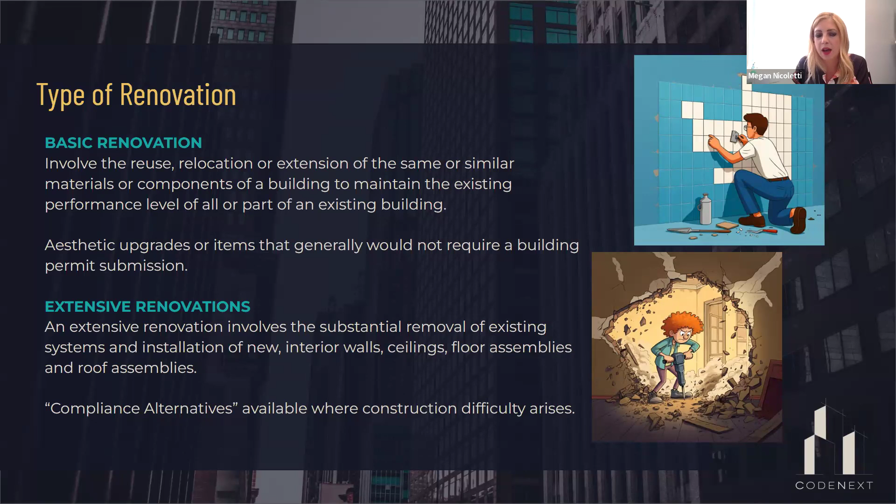And there's a specific requirement under extensive renovations under OBC 11.3.3.2 that I want to really get into the weeds on and go through because I want you to be clear. As a code consultant, word choices are key. We really look at every word. And for any of you who have written your exams, the and, or, except as, those are key words that you really need to tune in on.

And under this clause, 11.3.3.2, this requirement is when you apply barrier-free requirements, so like all your 3.8 requirements, when you're going to enforce them on your project. Because we get a lot of questions that come in and say, okay, well, I'm doing renovations to this space, but I don't want to touch it because it's not currently barrier-free, and I don't know when I need to make it barrier-free. And by adding this door, do I need to now renovate my suite and put in

a universal washroom? And so there's a specific clause that speaks to that, and this is under sentence 3 of 11.3.3.2. And I want you to be aware of that and conjunction. So there are 3 bullets in this requirement, and they are joined by an and conjunction, which means you need to meet every single one of these requirements in order for this sentence to be applied. I know the code does not read this well, so I'm trying to put it in layman's terms for you. So what it's saying is, if you meet every one of these bullets, you need to design that suite to be barrier-free. Okay? You have to meet every bullet.

So let's think to this. New interior walls or floors are installed. Sure, we're doing renovations to this space. So yes, we are doing partition installation. So yes, check for the first bullet. Second one, our suite has an area greater than 300 meters squared. Okay, let's say our suite is 600 meters squared and we're building new walls. Check. Now we go to the third bullet. And this, in layman's terms, is if that suite is accessible.

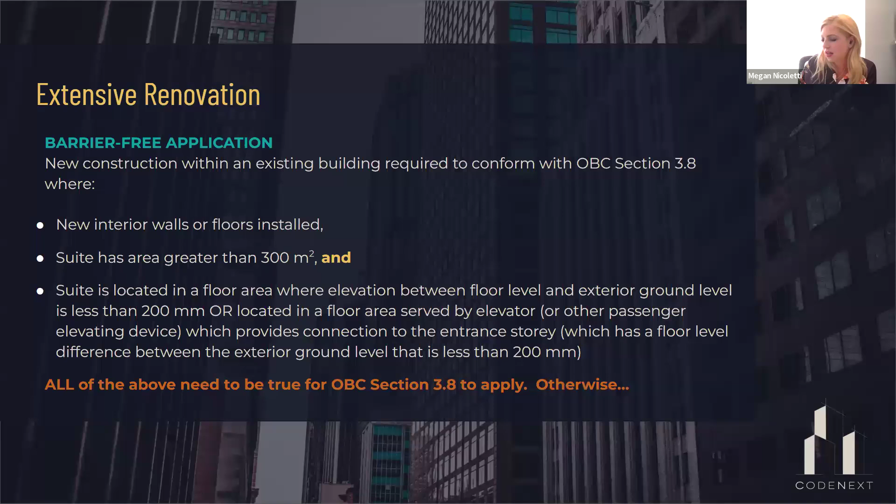Okay, so just note that and conjunction. However, the code does recognize that not everybody requires the use of a wheelchair, and there's other people that can be accommodated, even though we have this barrier at our front entrance. So we call these our limited barrier-free requirements. And these include interior walking surfaces, washrooms, tactile signage, doors, assistive listening devices, counters for telephones, and drinking fountains.

So even if you are exempt from that sentence that says you do not need to comply with barrier-free requirements of 3.8, you still have to design these items to be accessible. Okay, these are applicable no matter whether or not your floor area is served by a barrier-free path of travel. And to give you a little bit of context in that, I want you to think beyond the person in a wheelchair. Who might also benefit from increased access throughout a building, right?

Typically, when we say barrier-free design, people automatically assume someone in a wheelchair, but that's not always the case. We have someone who might require the use of a white cane, vision impairment, someone who uses a walker who can compensate for that single threshold or single stair riser at the entrance door, or maybe even navigate up through an escalator. We have people who maybe broke a leg and use crutches. Sure, they can go up a flight of stairs. Moms with strollers or dads with strollers, or even people with service animals.

All of these requirements for limited barrier-free will provide greater access for persons who have limited mobility and do not necessarily use a wheelchair or have a sensory disability. These people can still climb stairs or use escalators and would benefit from having wider doors or lever-style door handles or larger washrooms to allow them and their service animal.

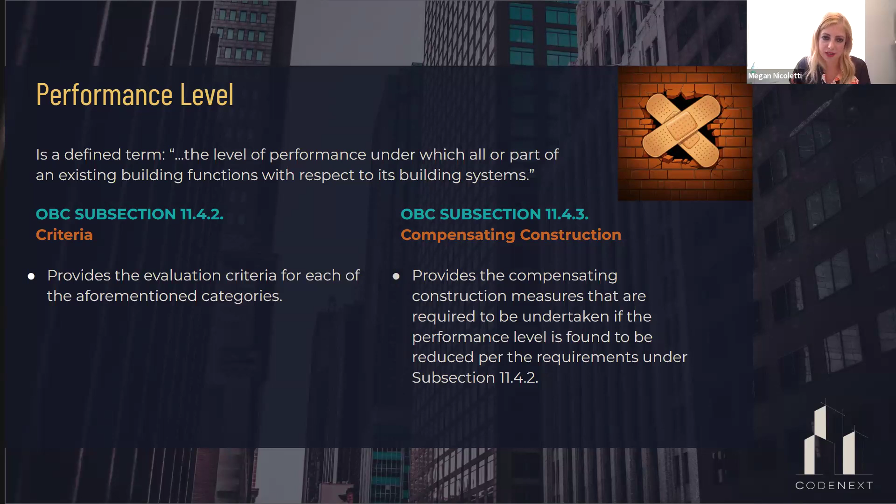So getting into this, this is an evaluating tool. So I'm gonna walk you through all the things that need to be evaluated and what compensating construction requirements need to be addressed. So the code breaks it down into 5 categories. This is all we need to evaluate. We don't need to look beyond this. If it's not prescribed by the building code, you are not obligated to look into it. So for example, if you're not touching your exterior windows, spatial separations is not covered under part 11. You're not obligated to go back and look at spatial separations. Okay, if you're just replacing a window like for like, that's a basic renovation. You don't need a permit. You're good to go. You don't need to evaluate it.

Okay. These are the only categories that you need to evaluate: structural systems, occupant load, change in major occupancy, plumbing systems, and sewage systems. That's all you have to look at. And if you affect any of those, then you have to do compensating construction for that. Okay?

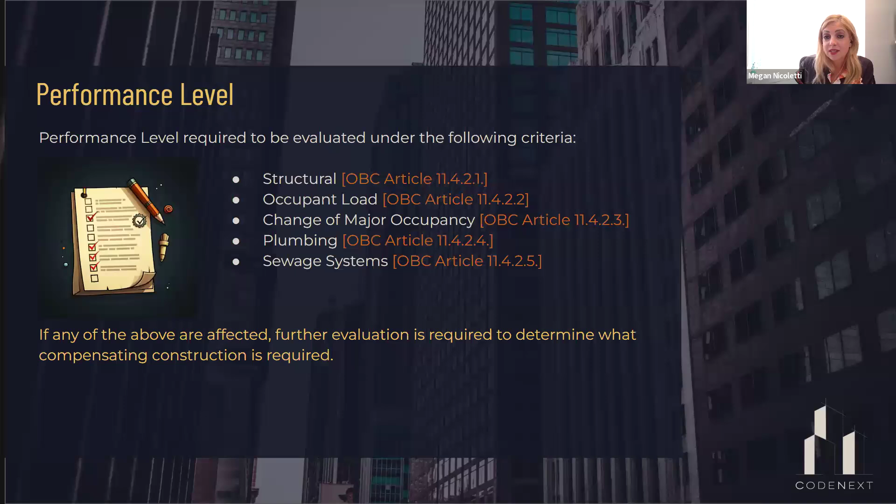If it's not on this list, you don't need to worry about it. So let's get into the weeds here. Structural systems. So the criteria, and again, the whole framework of this presentation: evaluation, compensating construction. So under 11.4.2.1, the evaluation for structural systems is to ensure that your structural systems are not adversely affected by a change in major occupancy, an occupant load increase, or a live load increase, okay?

To put that into better perspective, we have a building and we have an office floor area and the office tenant moves out and we put in a Zumba class, okay? Well, those people are now jumping on the floor. Is the floor strong enough to hold up that Zumba class? It's an A2, it's a fitness thing, right? Somebody needs to evaluate it.

So typically this falls into the wheelhouse of the structural engineer, but they need to evaluate it. And if that floor is not strong enough, they're gonna have to upgrade it. Right? So they have to take remedial measures. So that is a classic example, very straightforward for structural.

If you think that your structural systems are going to be affected by your change in major occupancy, or you're adding more people to a space, and it's going to be heavier, or your live load's going to change, then you should engage a structural engineer to evaluate that further and make sure those floor systems are strong enough.

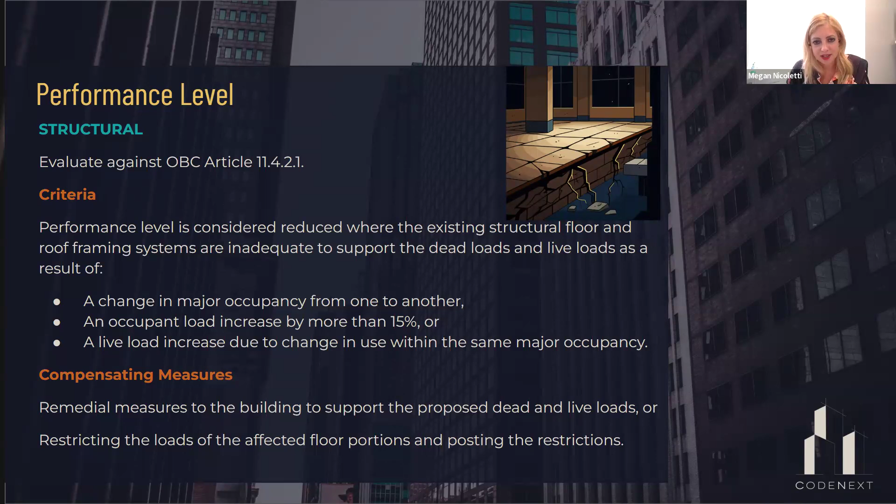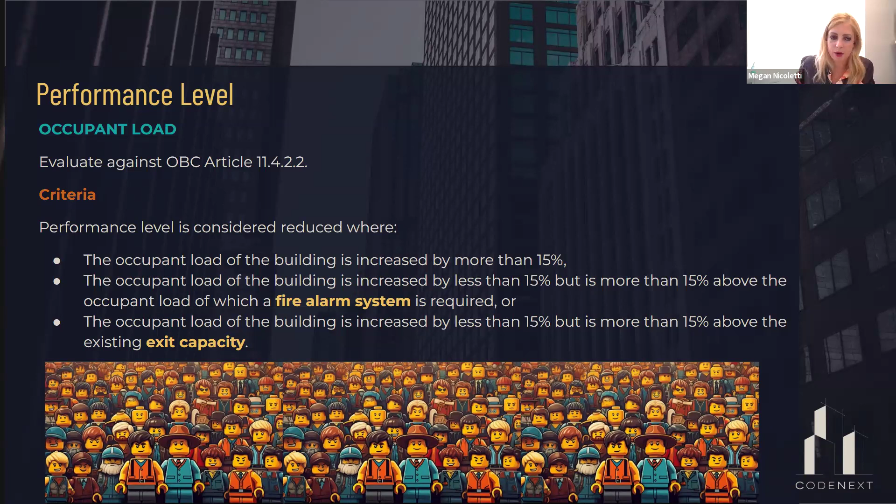Okay. The next topic, next bullet, would be occupant load. What do we mean on occupant load? So our criteria for assessing occupant load is, are we going to increase the occupant load of the building by more than 15%? If we're going to increase it by less than 15%, but beyond that which is for a fire alarm system or an exit capacity, then that's also deemed affecting the performance level and we have to evaluate it. So these are a bit harder to read, so I'm going to break these apart and get into them a little bit more deeply to clarify here.

So speaking to an increase in occupant load by more than 15%. The code gives you a bit of a construction tolerance here in the sense that if you're adding a few more people to a floor area, you don't have to go back and evaluate it. The codes are built robust enough that they can support an increase. The code considers it affecting the performance level in an adverse manner if you're more than 15%. So that's your threshold. If you're going to increase by more than 15% beyond which the building was designed for, you should evaluate it and see what's needed to support all those extra people.

Okay. Now I want you to be mindful of the language here. The 15% is increased beyond the occupant load of the building. It's not specific to a suite. Okay, so if we have an occupant load of a building of 100 people and we increase our occupant load to 115, we're not more than 15%, so we don't need to evaluate it any further. We can just say we're good to go, we don't need compensating construction. But if we increase that occupant load of the building to 116 people, then we have to evaluate it and potentially do some upgrades to our building.

Where it gets into the gray zone a little bit is with respect to increasing the occupant load of our suite. So we have a 10-story building, we have 10 people per floor area, and we're allowed to go up to 115 or 116 people. But what if one tenant wants to take all 16 of those people and put them onto their suite? Technically, the requirement of the code is satisfied because we're not increasing the occupant load of the building as a whole, but that suite is getting the benefit of that increase in occupant load.

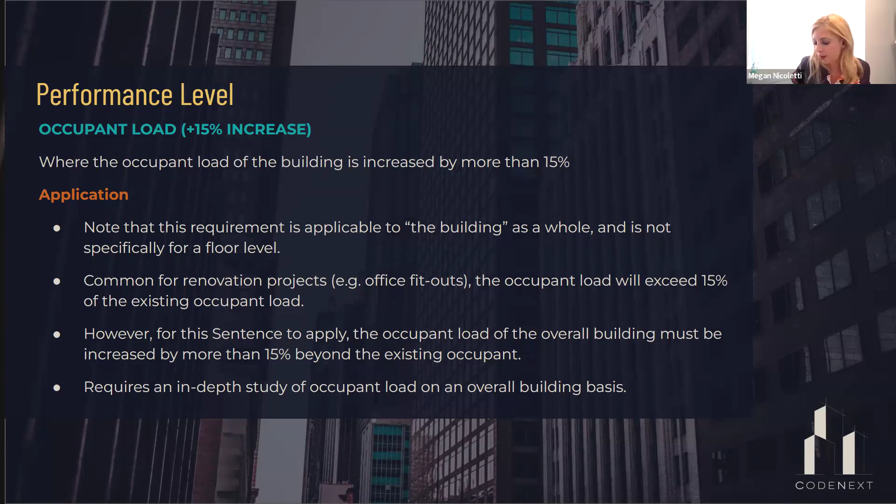The other requirement for increasing occupant load is increasing beyond that which is required for a fire alarm system. Now, the language of this article is quite specific, and it says where the occupant load of a building is increased by more than 15% beyond the requirements for a fire alarm system. So OBC section 3.2.4, it speaks to fire alarm systems, and it speaks to when you would require a fire alarm system.

So again, just going through an example here, if we have an existing building occupant load of 299 people, and we propose to increase it to 325. Well, the requirements state that you need a fire alarm system if your building occupant load is more than 300 people. So by verbatim of the code under Part 3, you would need a fire alarm system. But this is a grace that you get under Part 11, and it's saying you can increase 15% beyond that threshold.

So technically, 15% beyond 300 is 345 people. Okay, so as long as you don't go over that 345 people, you don't need to install a fire alarm system. Your occupant load increase is permitted, and you don't need any compensating construction in this regard, because in this scenario, we're only proposing 325. We're staying within that threshold. Okay, so be mindful of that language. That beyond is a key takeaway from this. And that's very similar to how we analyze exit capacity as well.

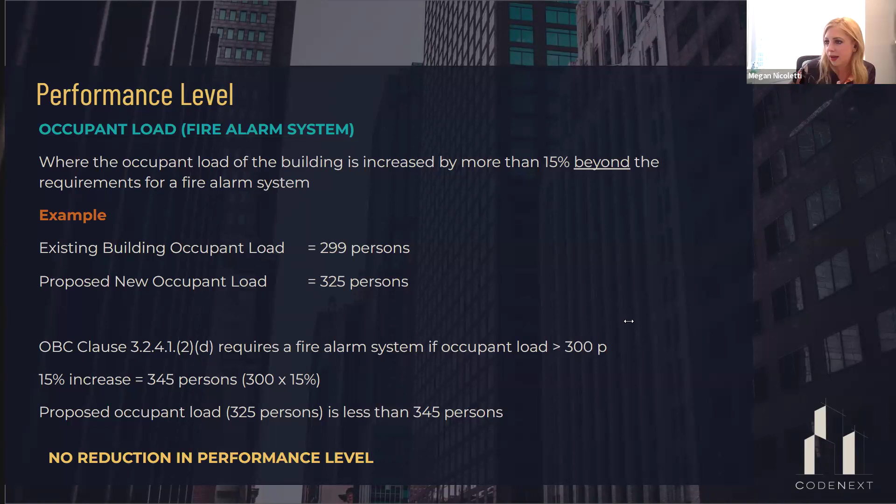Moving over to exit capacity. Again, same language, beyond, but more than 15% beyond the available exit capacity. Okay, so exit capacity is also determined under Part 3 or Part 9. I forgot to mention this. Part 11 does cover Part 3 or Part 9 buildings. Okay, so you can apply it in either situation. I speak generally when I say Part 3, but the same requirements could be applied to Part 9.

So exit capacity, our exits have a certain flow rate that we use to calculate an evacuation time for a building. And we want to ensure that we have a sufficient number of exit facilities, whether they're doors or exit stairs, to get people out of that building in a timely fashion. So if we're going to add more people to a floor area, then we might be creating some queuing at our exits, right? Which is going to delay egress. So again, we want to make sure that we have sufficient exit capacity, and it's that 15% beyond.

Okay. We often see people limit their occupant load increases based on exit capacity, because, sure, we can add another toilet here or there, or a fire alarm system might be able to be accommodated in a building, but sometimes it's very difficult to put an exit stair in a building. So in that case, we often see people limit the occupant load, and they advise their clients, all right, you can increase, but I suggest you increase only to 15%. You don't want to go beyond that threshold, because that may warrant an additional exit facility be installed into your building. Okay. There are also compliance alternatives on this, but I will speak more to those later.

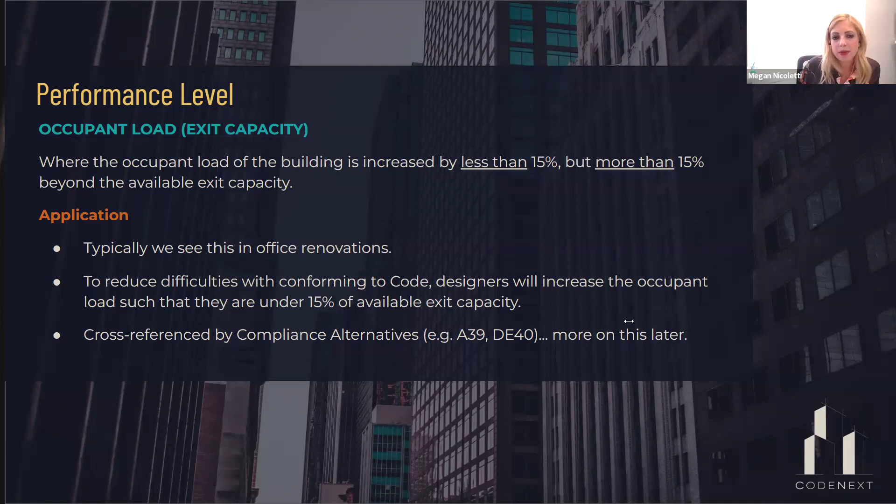So if we affect any of these, if we've increased our occupant load by more than 15%, we've added more people to our floor, or we've gone beyond those design requirements for a fire alarm system or an exit facility, we've affected the performance level. So we have to do compensating construction. So the compensating construction associated with an increase in occupant load is defined as requiring an evaluation of the early warning and evacuation systems.

Okay, this is an actual table right under Part 11, and it says go through and analyze this. And it's essentially a checklist, and it just says make sure that you aren't affecting travel distance, that you have enough emergency lighting, exit signs are put in. These typically, in my experience, have been picked up as part of your design fit out for that space, but it's a good little checklist for you to use.

So if you are increasing the occupant load of a space, then the building code is going to require that you evaluate the early warning and evacuation systems. I've put a little list there for your benefit. And if any of those are affected by your proposed increase in occupant load, then you will have to do compensating construction. So I'll tune in on that second last bullet, door release hardware. Our previous occupant load was, say, 50 people, and we're increasing it to 125 people.

Well, we're going to need panic hardware on our doors now, because we're over 100 people in those suites. Okay, so those are some of the upgrades that might be needed or warranted as part of that increase in occupant load. There are some exceptions to evaluating the early warning and evacuation system. These lean heavily on the Group C major occupancies, and boarding and rooming houses, or residential applications that have a very minimal small occupant load, like 14 or 10 people. So those are typically the only exceptions to evaluating that.

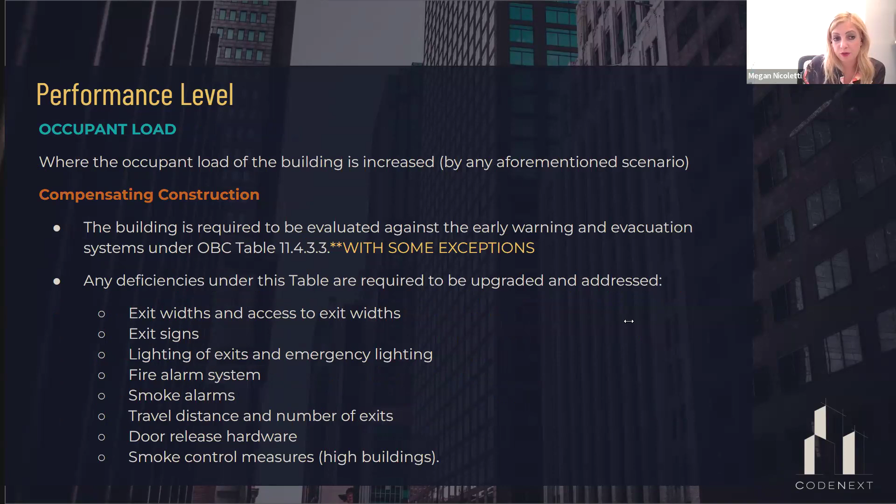Another compensating construction, and this is only applicable in Part 11. I'm not speaking to Part 10 here, but other things that have to be evaluated when we're, oh, sorry, did I jump ahead here? I did. Sorry, the next topic that we have to look at when we're evaluating performance level is change in major occupancy. So change in major occupancy, I spoke to it before. The OBC categorizes your occupancy types. So we have our Group A, our assembly, our Group B is kind of our detention and healthcare facilities. Group C, residential. Group D is our offices and our business suites. E, retail. F, industrial. And G for our kind of greenhouse or farm buildings.

And we see this a lot. We've got an apartment building that has a pool that's no longer used. And the owner's like, well, rent rates are quite high right now. I could get 3 suites out of this. Let's rip out the pool and we're going to put in 3 suites. That would be considered a change in major occupancy, even though it doesn't really fit the language of the code, but it is affecting the performance level of the building, and you need to do a full evaluation of it and potentially compensating construction. If we're flipping a Group A2 or a Group A4 into a gaming premises, those have a lot of specific requirements under the codes. We want you to evaluate those.

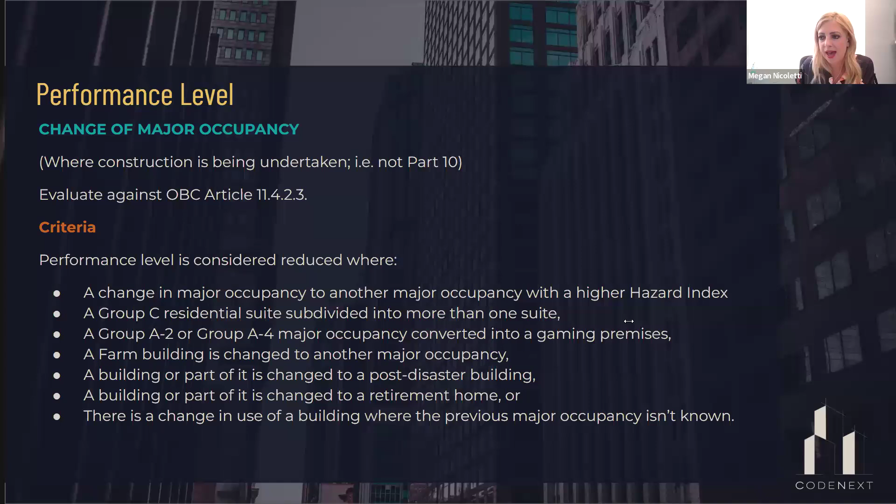The code's going to ask that you evaluate it. Okay. So if you check any of these, even though they don't really fit within the language of change in major occupancy per se, you do have to do further evaluation and potentially compensating construction. So let's go look at how we would kind of evaluate that and what the compensating construction is.

The code breaks down these requirements into hazard index and construction index. And this is probably what your biggest takeaway will be from this presentation, how we actually figure this out. And I'm going to walk you right through it, so hopefully you'll have some clarity here. This is the table for compensating construction, 11.4.3.4. Okay. And what it's saying is you have to assess the hazard index of the building. And if you make the hazard increased, then you have to do compensating construction.

But it needs to understand what the building is made of to see what upgrades are needed. And this is really in terms of your structural systems, your floor systems. Like, do we need to upgrade our floors, right? And it needs to know, are you a wood frame building? Are you a non-combustible building? All those come into play. Are you sprinklered? So these compensating construction requirements really hang on the construction of the building.

And they speak to, okay, well, this new occupancy is quite risky, we're going to want to see a sprinkler system installed in this space. Okay. So these compensating construction requirements, and I'll come back to this table, are how we really determine what we evaluate against. So let's get into this. Hazard index. This is the first step. We have to figure out what the hazard index is of our existing building, and we have to evaluate it against the hazard index of our proposed building.

So again, going on to that warehouse space, we have to assign a hazard index to the warehouse based on its functions and use. And then we have to evaluate it against a hazard index for our new office space. And if our office space has a higher number, then it's riskier, and we potentially have to do compensating construction.

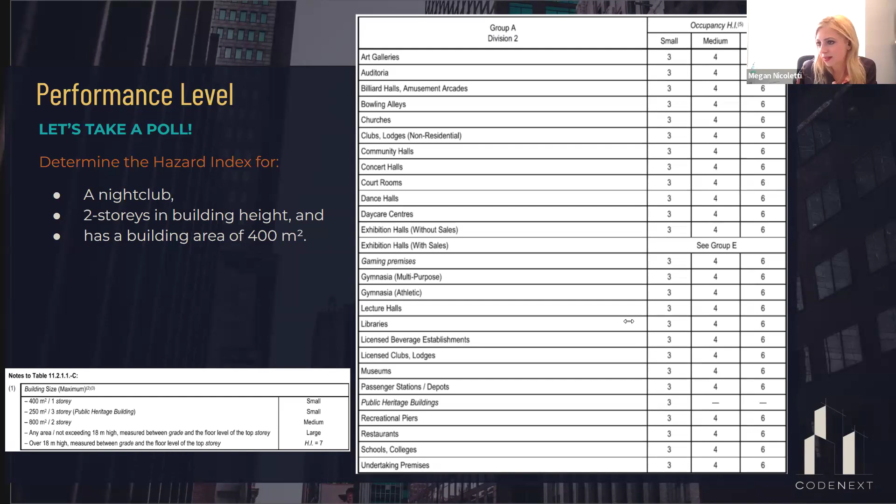So now we know, going back to our example here, we have an office occupancy, we assigned a hazard index of 2, and now we're making it a 4. We made it worse. It's got more hazard, right? It's a bigger number. So we need to do upgrades to the building to support that occupancy. So let's see here. The way the code is structured is, and I'm going to go back here. Let's see if I can go back. Yes. This is the table that we are now applying.

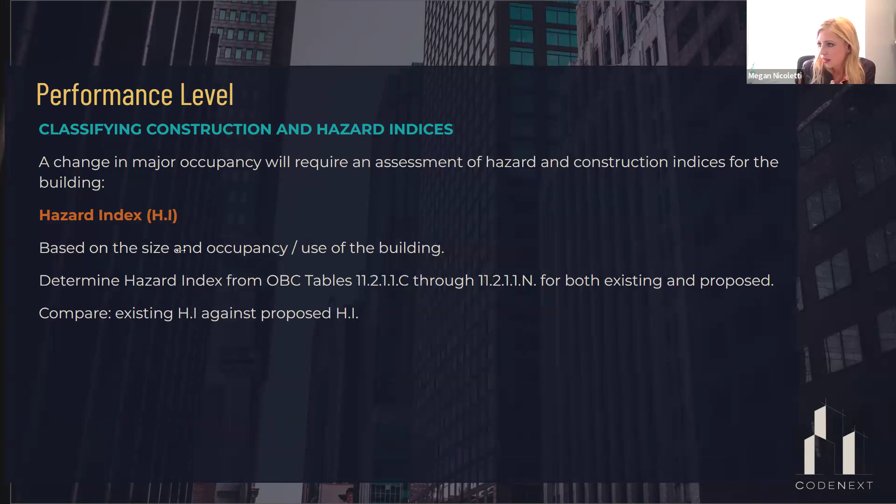So construction index. So this is under OBC table 11.2.1.1.A. And you essentially have to read through this and figure out what is the most conservative application for your existing building. So let's say we have a wood frame building and it is equipped with 30-minute floors and a non-rated roof. The roof is not rated, okay? And floors over basement, we don't have a basement, okay? So we can conservatively say, well, we don't have a basement, so we can kind of checkbox that.

I would assign it a construction index of 3, okay? Because we have that 30-minute floor, we don't have a floor over a basement, so we don't need to worry about that 30-minute threshold, and we have a 0-hour roof. So I would assign the construction index of 3 to this scenario. Hopefully everybody follows that. So now we've got a whole bunch of numbers here. Let's recap. Our existing building hazard index is 2. Our new hazard index is 4. And our construction index for our building is 3. Okay. So going back to this table.

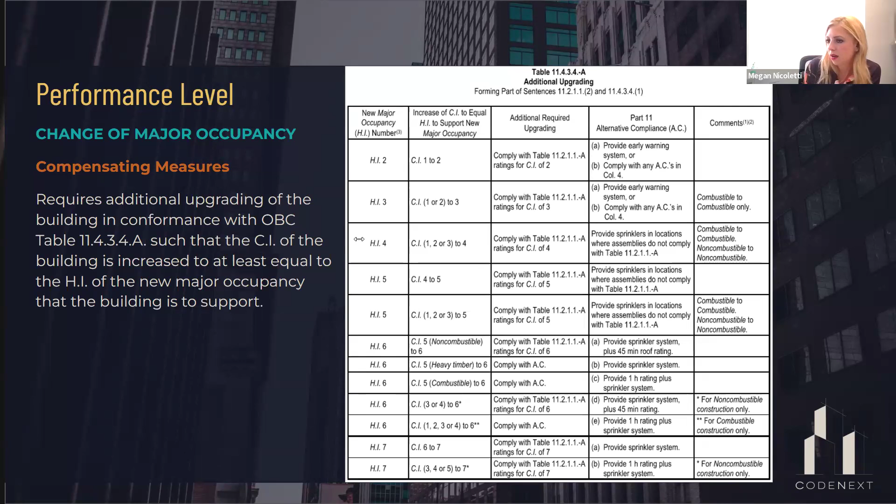Okay. So this is how we evaluate it. We look at the existing hazard index and the new hazard index. If you increase it, we have to then evaluate that snapshot in time. What does the building have and how are we going to upgrade it? What compensating construction is needed to support that? I do realize that's a bit complicated, so I've built you a roadmap. You can go through all of this; you just follow the arrows, yes or no. You're welcome to take a screenshot as a reference tool, but a copy of the presentation will be made available, so you will have this slide. So that's the pathway to evaluating the performance level with respect to a change in major occupancy.

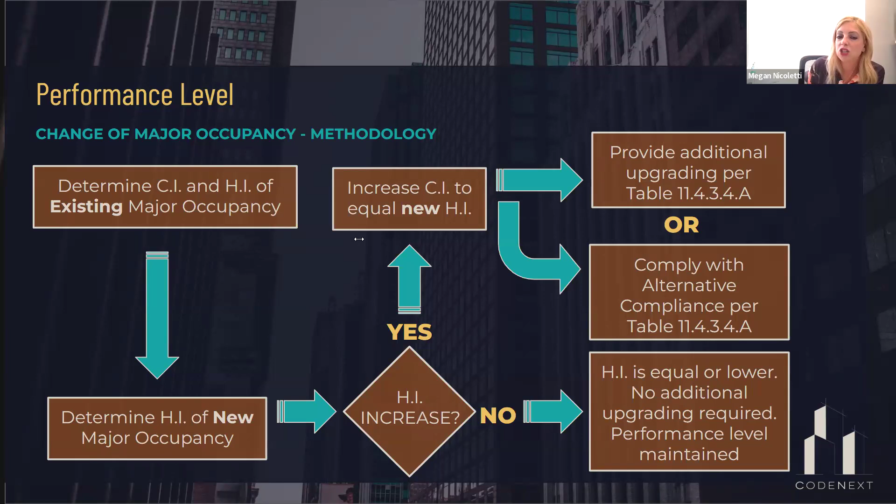In addition to those, there are some other requirements that we still have to evaluate under a change in major occupancy. Even if we are not affecting the hazard index, we had a 2 and we're keeping it as a 2, even though it's a change of use, the code still requires us to evaluate the early warning and evacuation systems. It's going to look at tenant-to-tenant fire separations. So if we had 2 office suites that previously did not require a fire-rated demising wall between them, and we're flipping one to be a retail tenant, those tenant suites have to be separated from each other. So you may have to upgrade that existing demising wall. That's one of the evaluators here.

And the construction of the building will change to a Group C occupancy in a building that's over 3 stories in height. We really want to protect those residents who are sleeping, who are at higher risk during an emergency. This is particular to those requirements under 3.2.2.44 for mid-rise combustible construction buildings. And what do we need to do to compensate if we are affecting any of these? In that demising wall situation, if it was not protected with a fire-rated assembly, we may have to upgrade it for tenant-to-tenant safety. Another option is we may have to sprinkler a portion of the building affecting the space that's being changed. So there are compensating construction requirements if you determine that you are impacting these in an adverse manner.

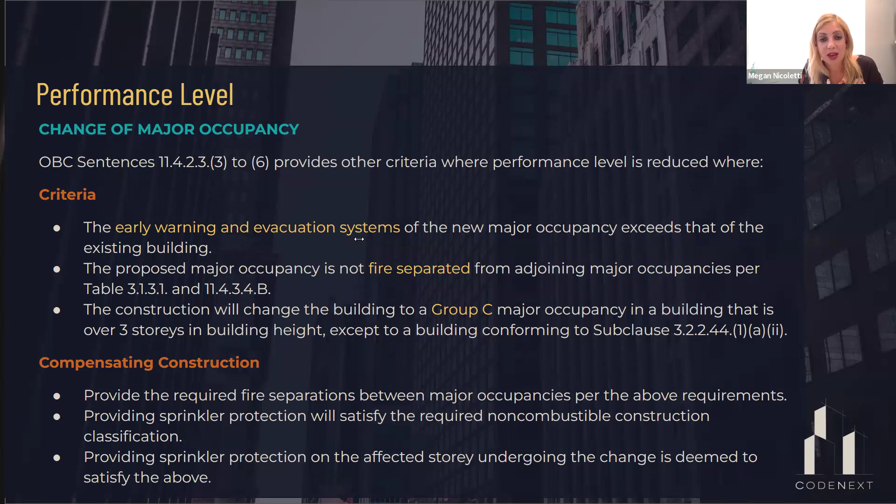Another requirement of the code that we have to evaluate if we're renovating a building and having a change in major occupancy, or increasing the occupant load, is making sure we have enough toilets to support that new major occupancy. Oftentimes in our office suites, we're making the suite more dense and leaning on washrooms in the core being used by multiple tenants. So we want to ensure that we have a sufficient number of toilets within our suite, or access for people from our suite, so that we can support those new occupant loads.

So the criteria here for evaluating whether you need additional toilets is if the plumbing system in the existing building is adversely affected by your renovation. If you're going to increase your occupant load, clearly you're going to have to make sure that you have enough toilets to support those new people. If we're adding bedrooms to a dwelling unit, we're adding people to our dwelling unit. And if we have a change in major occupancy, that's going to affect our sanitary. So these are requirements that we will have to look at under Part 11, and obviously compensating construction: put more toilets in. It's pretty straightforward.

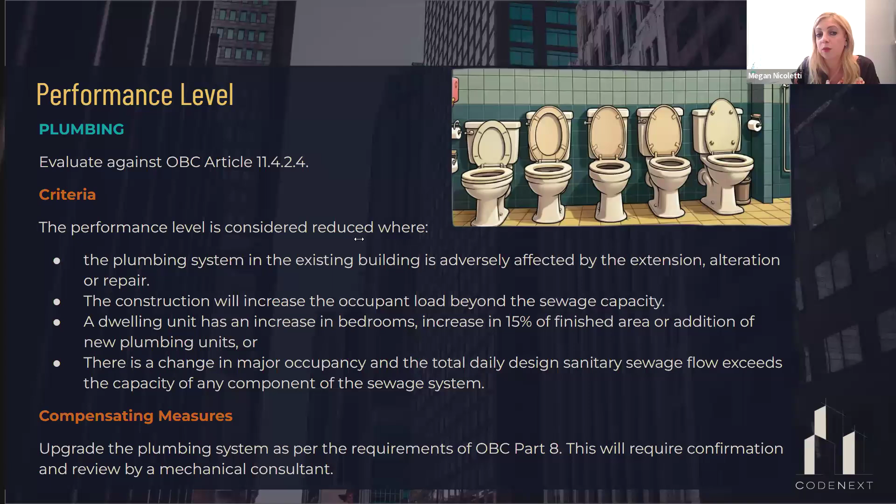In terms of how many toilets you need to apply, and lavatories, I should include those, you will fall back to Part 3 or Part 9, okay? So any new construction is still governed by Part 3 and Part 9. So if you're putting in new toilets, the capacity of those toilets will be derived from those other parts, just like you would if it was a brand new building construction, okay?

Now, if we're putting in new toilets, we have to make sure that our sewage systems for our building can accommodate all these extra toilets. So that's another key feature that we want to look at. This typically falls into your mechanical's wheelhouse, but you want to make sure that you don't just add toilets and that your sewage systems and pipes can accommodate all those additional facilities. So that's going to push you back to Part 7 requirements.

So that's assessing the performance level and compensating construction requirements. Like I said, the building code is structured 11.4.2 evaluating. And if you hit any of those requirements, if you're affecting them in any adverse manner, then you have to do compensating construction. So it says if you're affecting the occupant load under 11.4.2, turn the page. You turn the page to 11.4.3 and it says, oh, you affected the occupant load under Sentence 11.4.2, then this is what you have to do. And that's really how Part 11 reads, okay?

It is pretty straightforward. Use it as an actual checklist, mark it up, checkbox X, checkbox X, and then you cross it over and there's all cross references between. So it's saying if you affect it, then you have to do this per this, and it gives you that code reference to follow, okay?

Grandfathering. Compliance alternatives. So the building code does recognize that some of our buildings were built a long time ago, potentially not even under a building code. The first edition of the National Building Code came out in 1941. It was adopted based on an amalgamation of a lot of municipal bylaws so that all the jurisdictions could align on some of the prescriptive requirements and acceptable solutions. So a lot of these buildings that we're working on are over 100 years old and don't necessarily fit the language of the building code today.

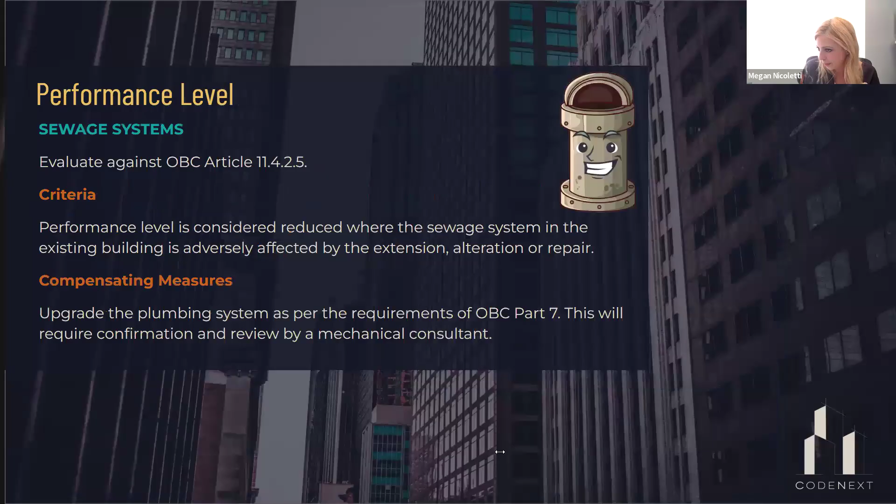In the analogy that I gave, we don't have a basement, okay? So we shouldn't be faulted for not having a basement. So we would consider no basement as equivalent to a 30-minute basement. Okay, so I would give you that. Hopefully that makes sense. So I would apply a construction index of 3 to this situation because we don't have a basement. So there's no risk of a fire below burning upwards to affect people on the first floor, right? It's kind of analogous to that. So that would be the construction index we would apply to the example.

Next question, if a roof system is replaced for maintenance reasons only, does the roof insulation need to comply with SB 10? Oh, great question. Okay. If you're only replacing the roof, like the roof tile, say, then that would be considered a basic renovation, right? We're not taking the whole roof off and affecting the structural system and all the insulation and such. So technically you could say, no, the existing roof insulation is going to remain.

But if you're taking the insulation out and putting in new insulation, well, then the new insulation has to meet current code. Okay, so it would have to comply with SB 10. But if you're leaving the existing insulation, then you're under no obligation to upgrade it. The building code is not retroactive. So you could take that roof tile off and just put new roof tile on, and you're not obligated to meet SB 10.